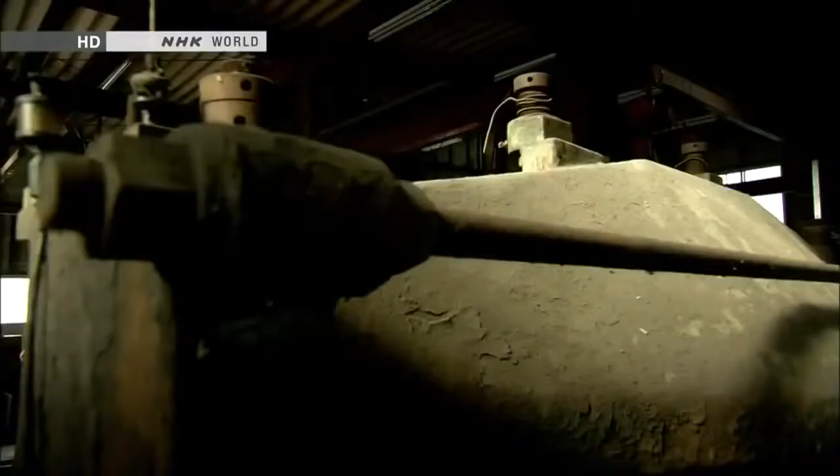In a workshop near Mount Fuji, a curious being has appeared. It's 3.8 meters tall and weighs 4 tons. It is a giant humanoid robot named Kuratas.

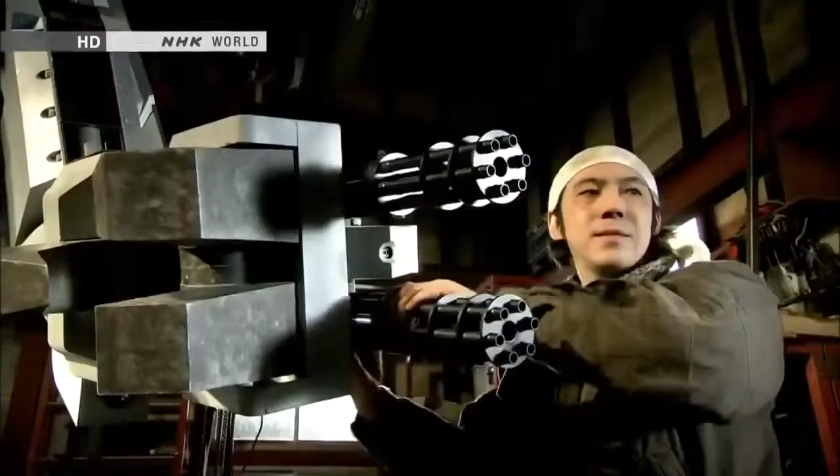Kuratas is a contemporary artist's creation. He holed up here for 2 years, building the robot with input from an expert.

He calls Kuratas a work of art, but it's a sophisticated piece of machinery. A person seated inside can control the robot, move its limbs, and grab things.

The artist says he was inspired by robots in science fiction tales and animation. That vision sustained him as he worked in solitude.

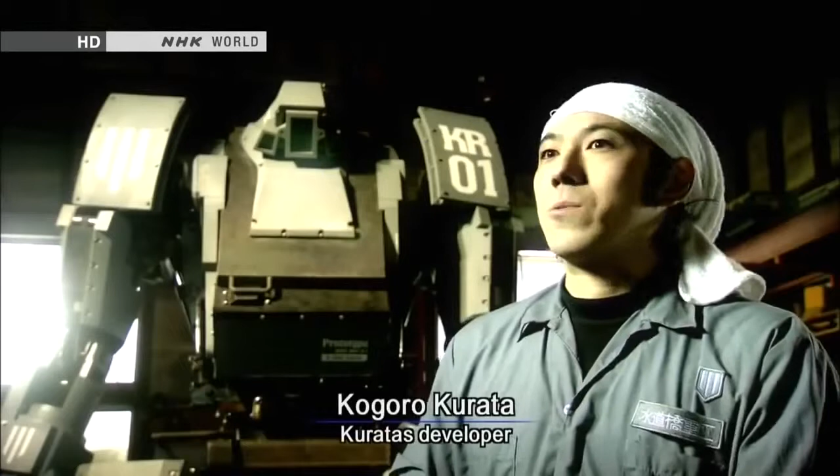Things that were once unthinkable are becoming real. How will robots evolve? Well, military applications could be one option. They'll probably become more and more like humans. They could surpass us in strength and ability.

People long dreamed of creating these extreme machines. Now, humanoid robots are here.

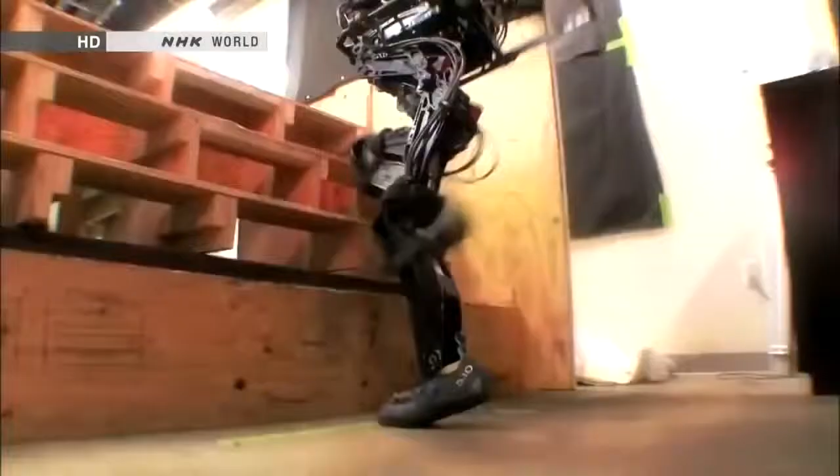They think like we do, move like we do, and even sacrifice themselves for us.

We want our robot to change society, because robots must be useful. Electronics and computing, progress in vision systems, there's many pieces of it. We will see much more capability continue to grow.

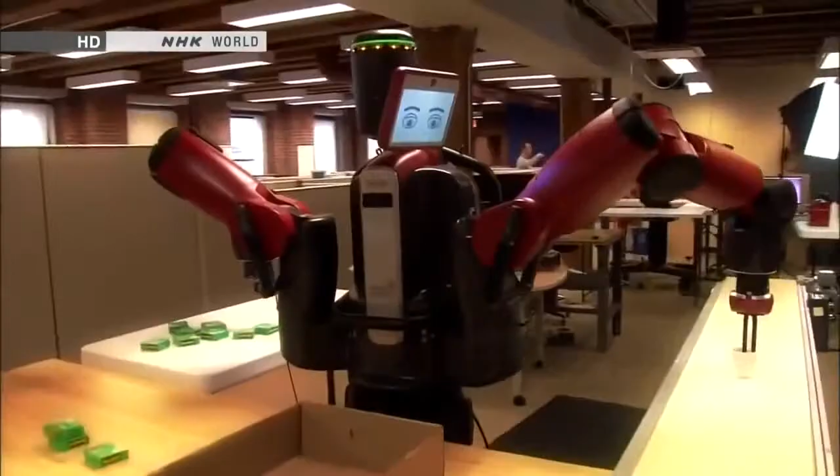Since the Industrial Revolution, people have entrusted some jobs to machines. But there may come a day when humanoid robots do much more complex jobs. Then, what will people do?

And you'll see more and more robots doing things in society, whether it's manufacturing or service applications or home healthcare applications. The key will be to skillfully divide labor between humans and humanoid robots.

The disaster that hit Japan in March 2011 accelerated efforts to develop robots with human traits. The Fukushima nuclear accident left people powerless.

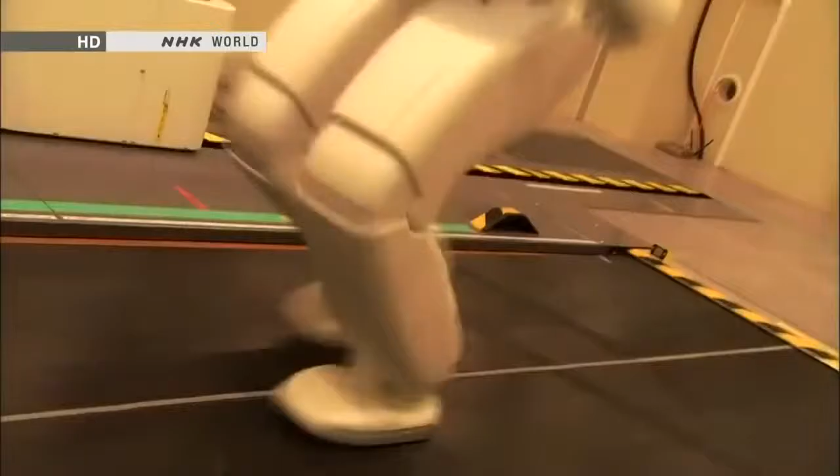Robots can take over when things become dangerous. They can plow through rubble, climb ladders, even make repairs. People are turning to humanoid robots to handle all of these tasks.

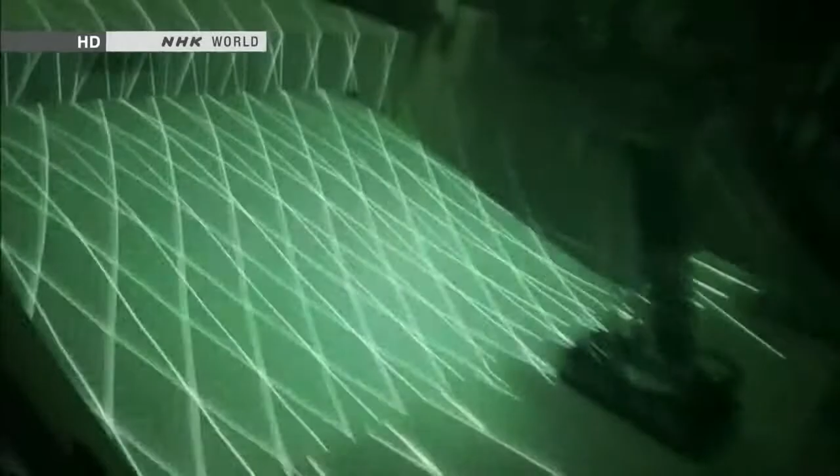We're eager to launch it soon to end the crisis. By joining forces, we can make a truly useful contribution.

Only a humanoid could do it. Or the day will come when robots will really assist mankind. The nuclear disaster in Japan sparked explosive advances in humanoids at the front line of robotics development.

This program explores the future that's fast approaching.

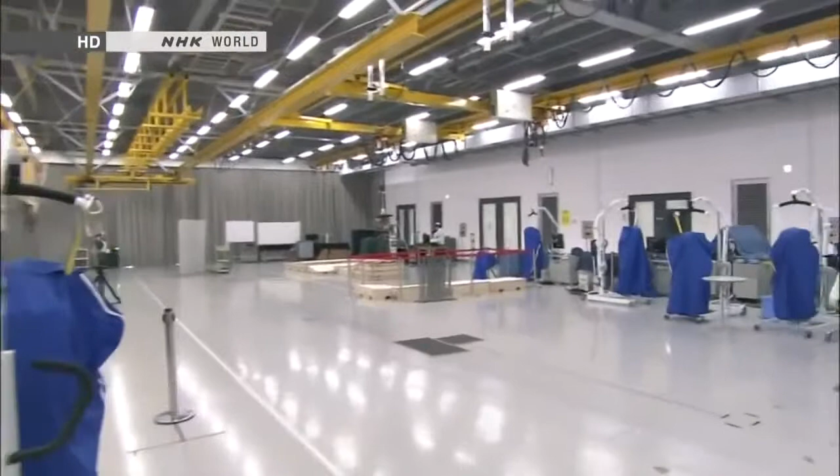Japan is a worldwide leader in the development of humanoid robots. Asimo is the country's crowning achievement. Engineers continue to make improvements.

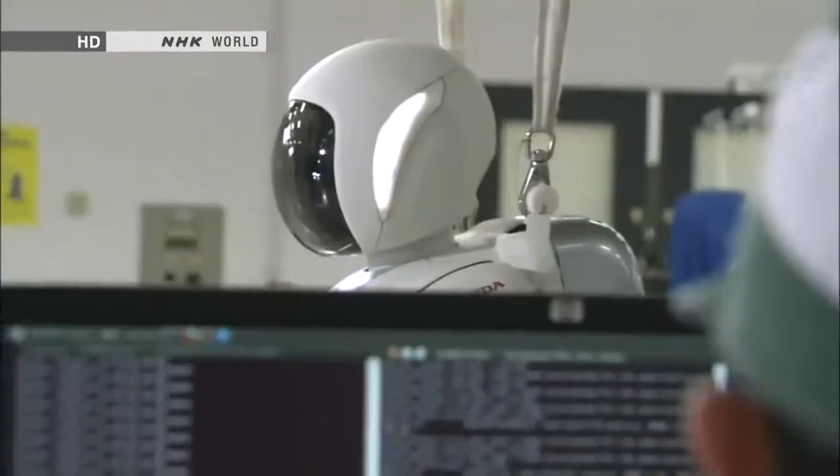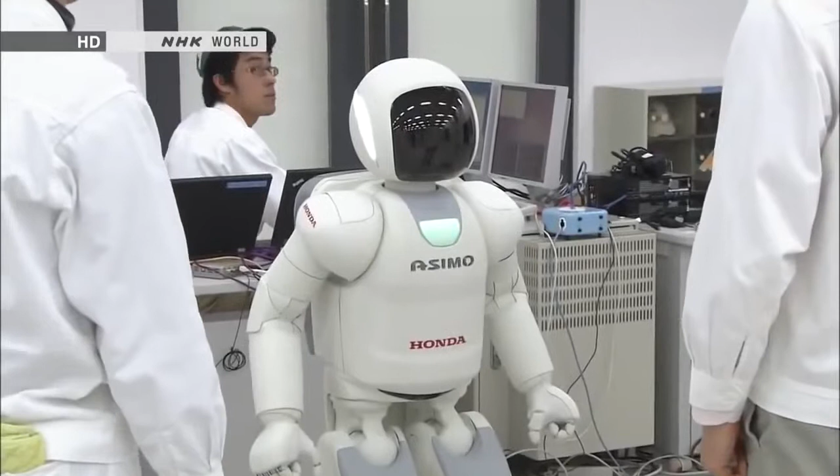Asimo's most innovative feature is its advanced intelligence. The robot can think and act on its own without human intervention. That's made possible by sensors that replicate our 5 senses.

Asimo's head contains 8 microphones. It uses them to listen and engage in conversation.

Asimo's artificial intelligence analyzes a vast array of information. That's how it understands people's requests and takes appropriate actions.

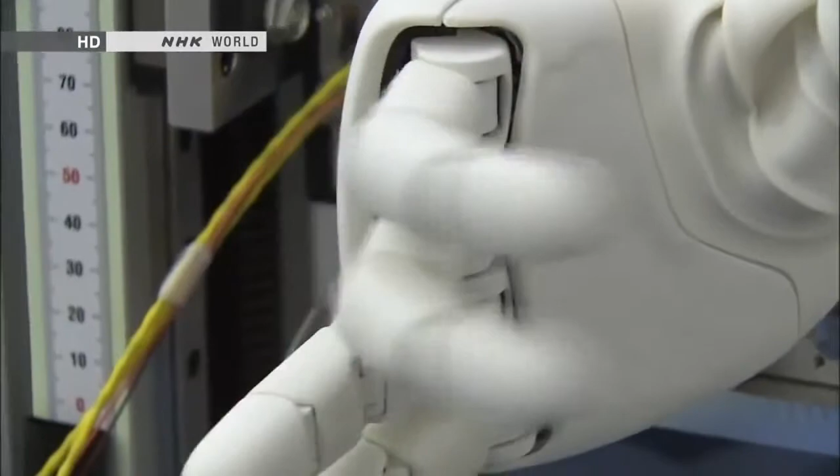Asimo also has a sophisticated sense of touch. Its fingers can make subtle movements, like a person's. Sensors are embedded in the fingertips, too. They can gauge the hardness of an object, like human fingers do.

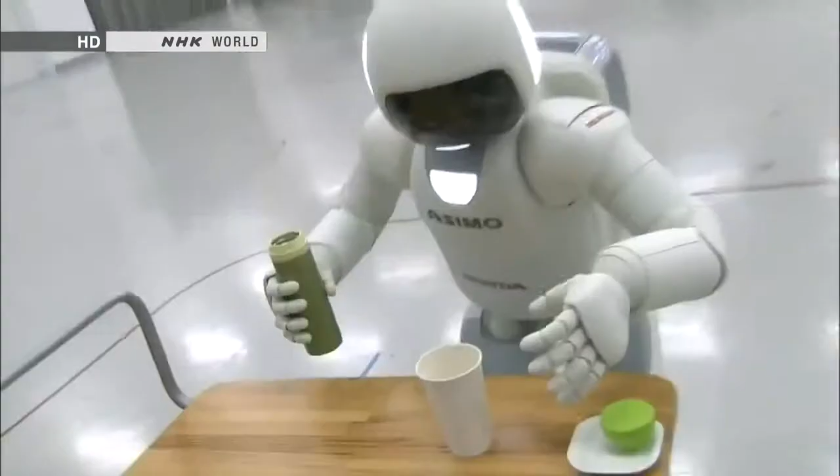Most robots use a fixed amount of strength to grab things. But Asimo exerts more power to open a tightly sealed water bottle and less when holding a paper cup. Its artificial intelligence uses information from the fingertip sensors to adjust the grip.

The developer's ultimate goal is for Asimo to be a valuable partner that coexists with humans. The engineers who created Asimo all grew up watching animated shows about robots, such as Astro Boy, Doraemon, and Gundam. They dreamed of someday making their own.

Satoshi Shigemi is the development team's leader. He has been designing robots for the past 16 years.

From the beginning, we wanted to design a robot that could help people. To realize that dream, we're constantly asking ourselves, what kind of robot would be able to change society, make people happy, and make life easier for people around the world?

Our idea is to create a robot that will change how people live. We're working through the technological issues, one by one, in order to reach that goal.

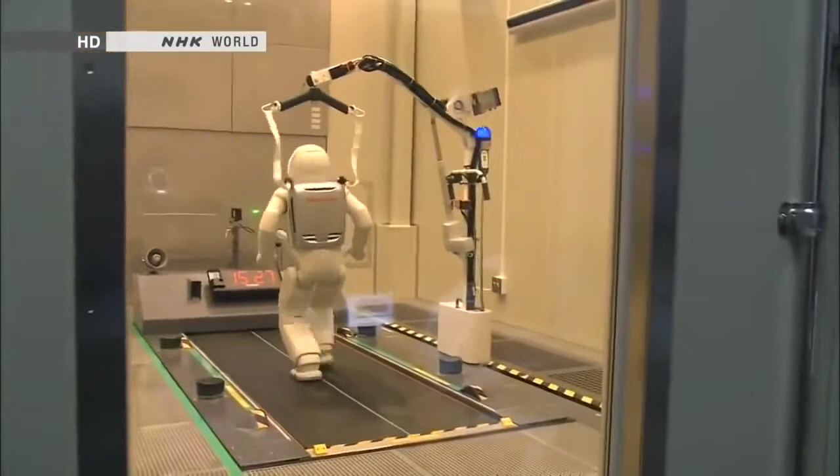Asimo's advanced physical capabilities are revolutionary. The robot can walk and run. It can reach speeds of up to 9 kilometers an hour.

For robots, walking is much easier than running. When running, both feet momentarily leave the ground. Balancing in mid-air is no easy task.

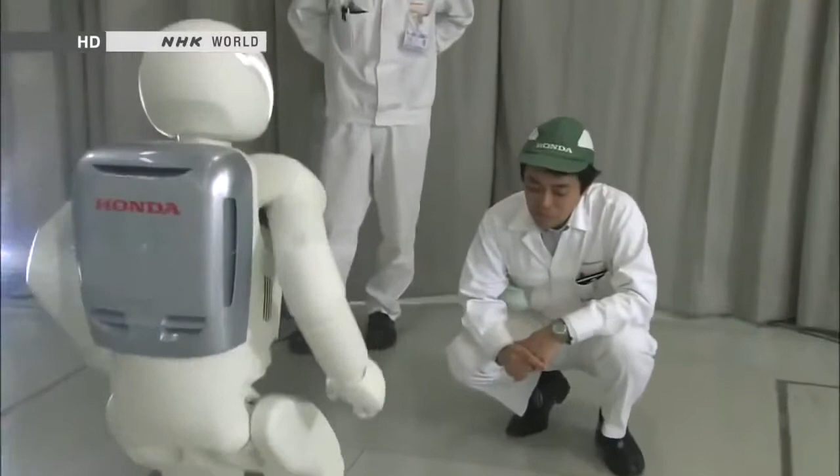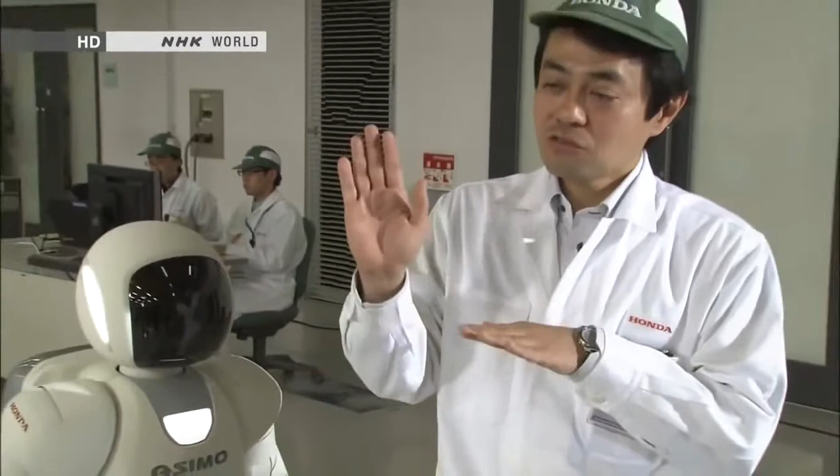Maintaining posture while jumping or floating in the air was a major technological breakthrough. Asimo leans its upper body slightly forward to maintain overall balance, going forward straight in the air. Sensors in Asimo's waist measure the robot's angle, and it leans slightly to compensate, forward or back, side to side. That's how it stays perfectly balanced in the air.

Asimo has been evolving ever since development began in 1986, much like a growing child. But something happened that made researchers realize Asimo's real-world limitations. It was the accident at Tokyo Electric Power Company's Fukushima Daiichi nuclear plant.

The damaged reactors released radioactive substances, making it difficult for humans to deal with the crisis. People needed something that could confront the dangers and bring the plant under control. Robots.

Japanese officials sent a request for robots developed by the US military. The robots were sent to Fukushima in April 2011. They recorded images inside the damaged reactors.

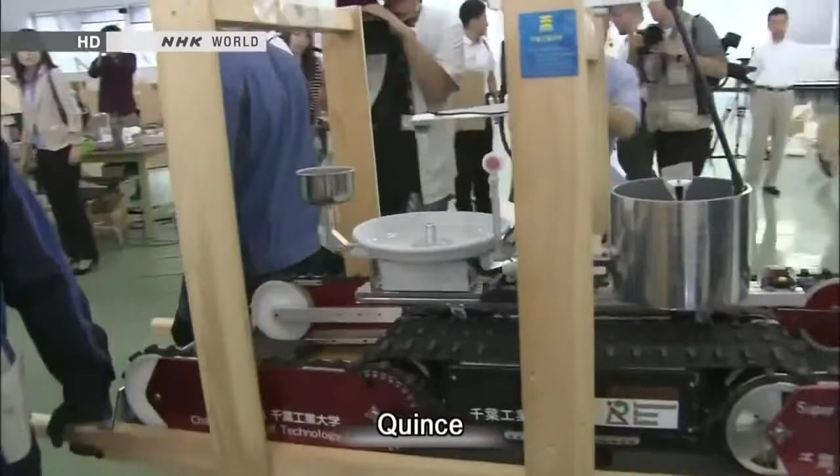Since then, a variety of Japanese robots have been enlisted as well. Robots had proven to be useful, but 2 years after the accident, they're only used for inspections. They're not able to do all the work of humans.

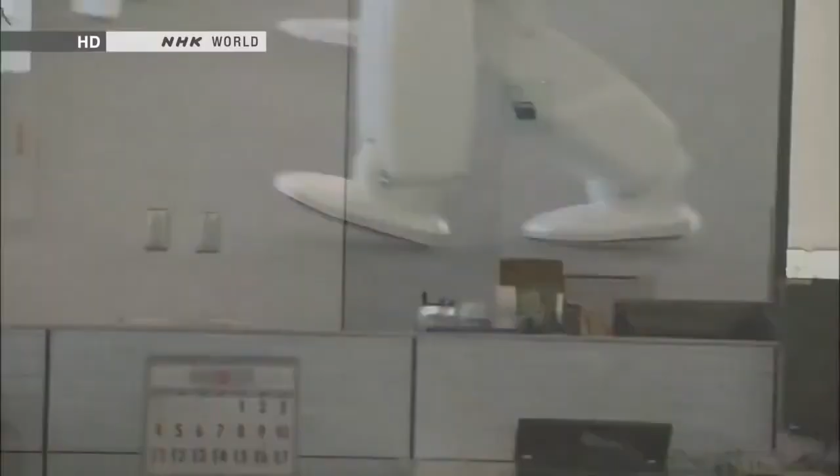What about Asimo? Right after the disaster, people flooded Honda with phone calls and emails asking the company to send Asimo to the Fukushima plant. But Asimo wasn't up to the task. It could move nimbly over an office floor and other flat surfaces, but large vertical gaps and obstacles were a different story.

We heard from many customers. We ourselves regretted that Asimo couldn't be of help. It was obvious that the Asimo we had built wasn't ready for real-life action. We realized right away that we needed to make something different, something new that could offer immediate assistance.

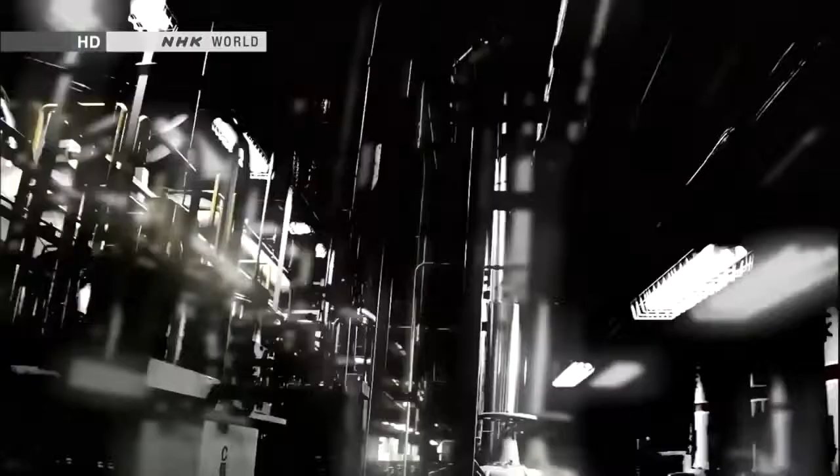Honda wasted no time. Company officials offered to create a robot free of charge to assist TEPCO in the recovery. TEPCO accepted. Officials asked for a robot that could open or close valves inside the nuclear plant.

We wanted to flush out radioactive materials that remained inside the pipes and bring down radiation levels in the facility. That was our first goal. Unless we opened or closed the valves, the area would remain highly radioactive, and that would prevent workers from entering the facility and impact the entire decommissioning schedule.

How many valves are there? Each unit has from several thousand to tens of thousands of them.

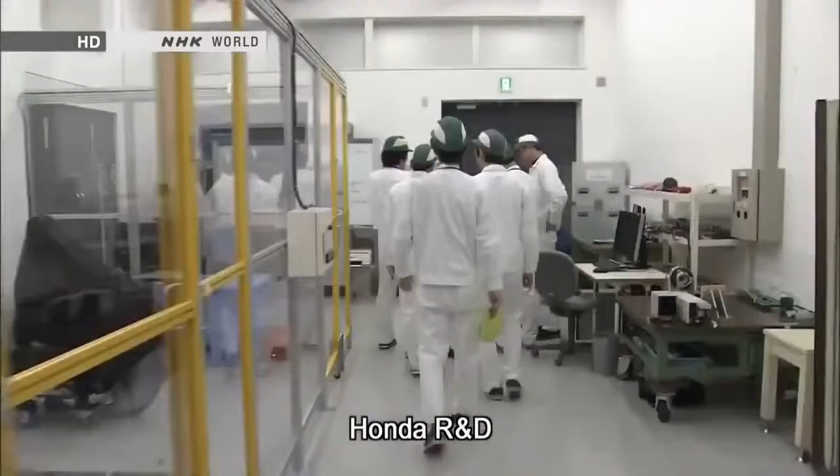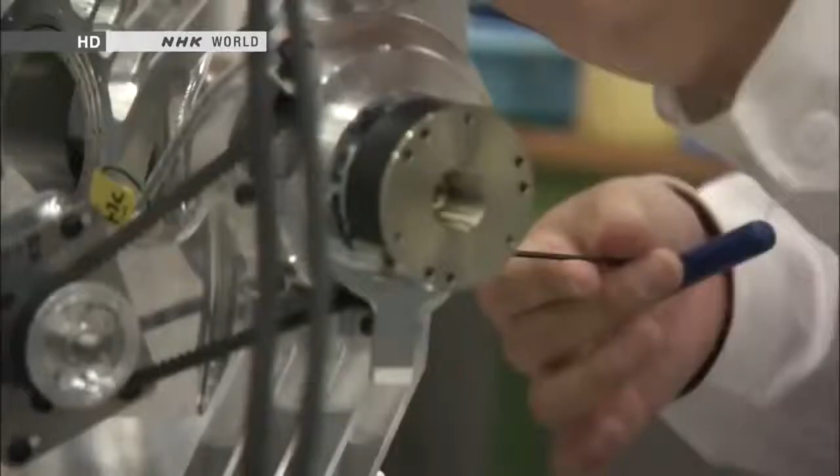In July 2011, 4 months after the accident, Honda began designing a robot for use at the nuclear plant. Members of the Asimo team were put in charge of the project. A humanoid robot would take too long to build, so engineers focused on making a robot specifically for operating valves.

Asimo was crucial to their efforts. Its ankles employ advanced balancing technology. Developers reasoned that using it would allow the new robot to work inside rubble-filled reactor buildings.

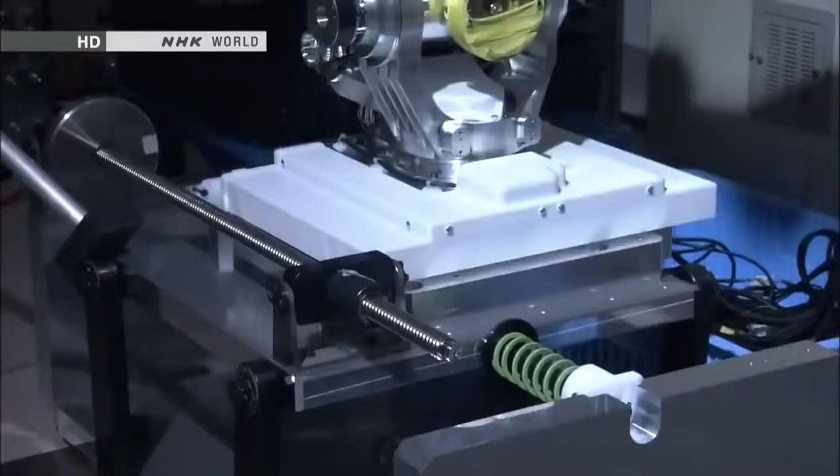The team worked exceptionally fast, completing a prototype in just 4 months. They turned Asimo's leg into an arm for operating the valves. Even when the base moves, the arm remains steady.

So far, so good. Officials from TEPCO evaluated the prototype at the National Institute of Advanced Industrial Science and Technology. The government-backed group for cutting-edge research contributed to the development effort.

A TEPCO official couldn't take his eyes off the robot's movements. We may be quite demanding. That's okay. We might be quite direct. The test is designed to replicate conditions inside the nuclear plant.

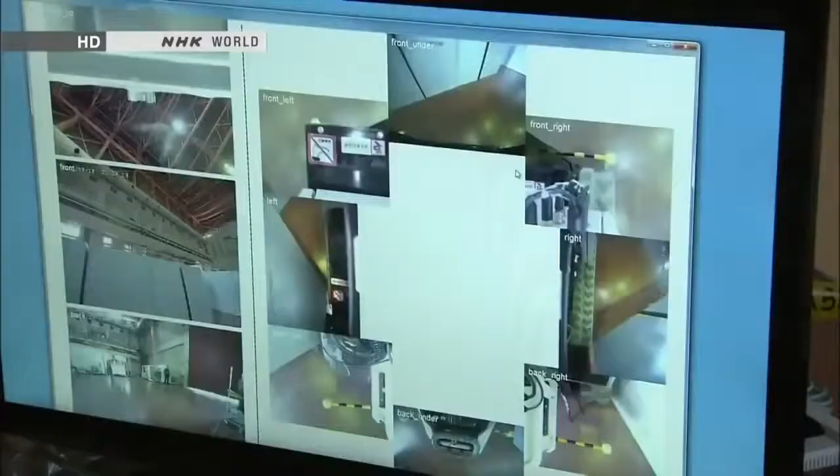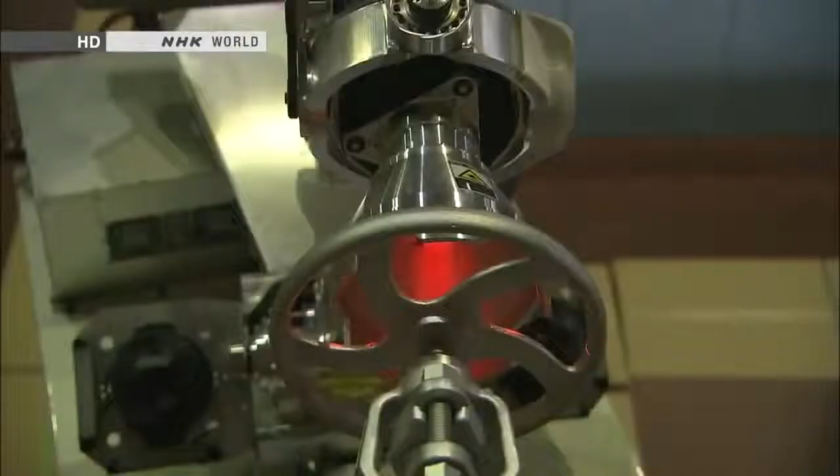The robotic arm is remote controlled. Testers send the arm toward one of the valves. There are a number of unknowns, including the condition of the valves. They may have rusted since the accident. A valve might break if the robot applies too much force, or it might not budge at all.

The robot uses just the right amount of force and turns the valve on the first try. It's passed the test. This robot can do more than inspections. It could help in the recovery effort.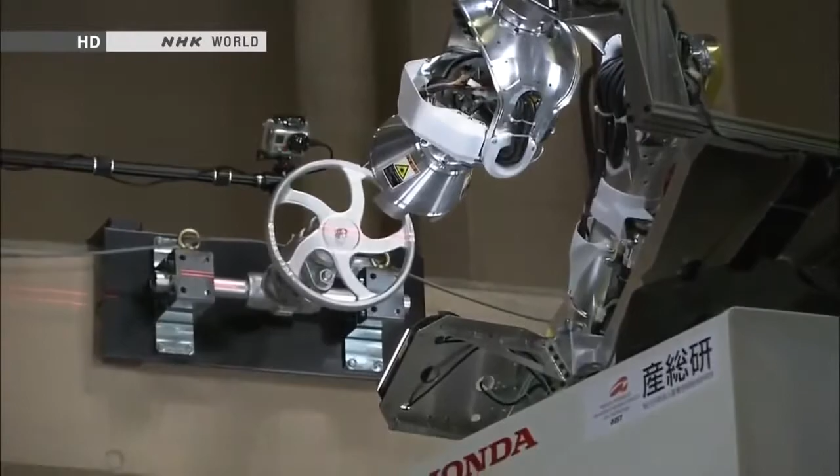From what we've seen, the robot seems near perfect. We want to use it as soon as the need arises. It's important that we quickly do what we can to make that possible.

The Fukushima accident also encouraged U.S. developers to design emergency response robots. Department of Defense officials have spearheaded the effort. Before, they had shown little interest in humanoid robots. Now, they view them as vital for disaster response.

The architect of the new strategy is Gil Pratt of DARPA. He oversees funding for leading-edge research at the Department of Defense. There are many aspects of disaster response in Fukushima that inspire people in robotics to work on new capabilities.

If they were able to take action during those first 24 hours, then the first reactor maybe would not have blown up in an environment that is too dangerous for a person to do. What's important to us is that the robot is compatible with human environments, compatible with human tools, and also compatible with human operators without special training. As a result, the easiest form that comes to mind is the human form.

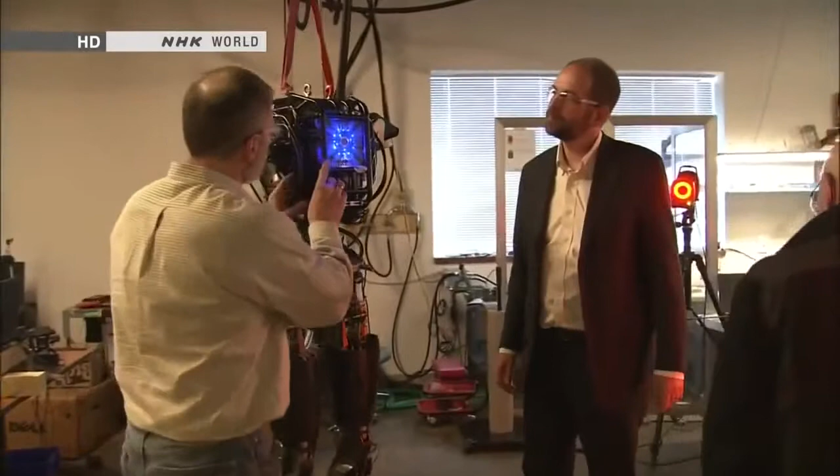This is the first American-made humanoid robot for disaster response. It's called Atlas. Before, U.S. designers had focused on robots with specialized functions.

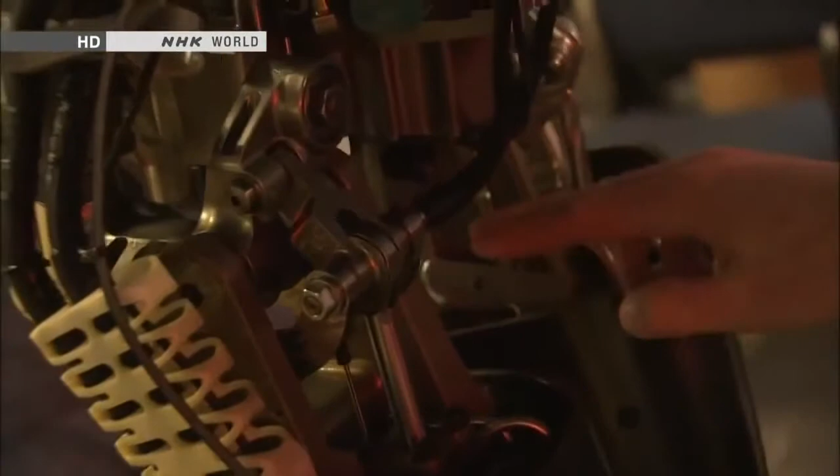Why the sudden interest in humanoid robots? Traveling over debris, prying open valves, using tools for repairs - performing multiple tasks like these is impossible for specialized robots. Crises also require robots that can navigate doors and stairs. Humanoid robots are ideally suited for such situations.

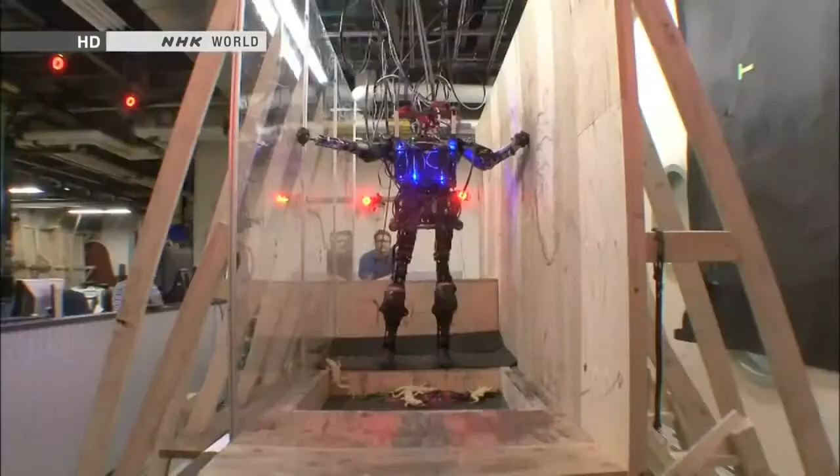Tests of this prototype were going smoothly. It can easily climb stairs and jump from a height of nearly 1 meter, and can negotiate obstacles using its arms and legs. It can already handle more demanding environments than Asimo can.

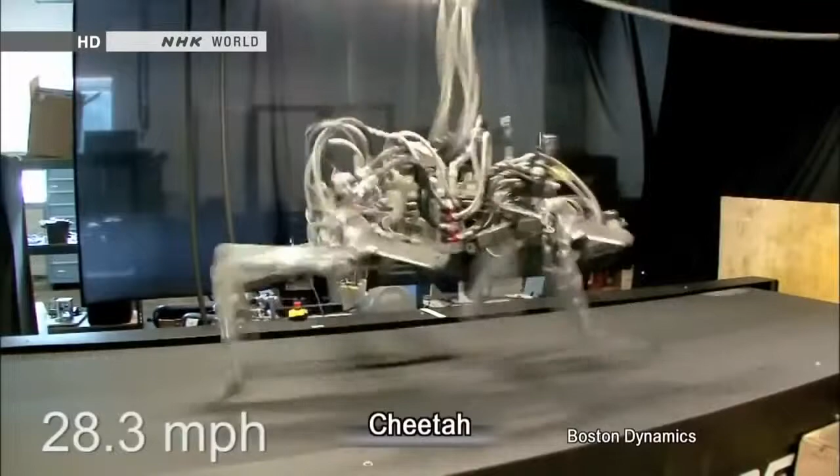Atlas is loaded with technologies originally designed for military robots. A quadruped robot called Cheetah can race through a battlefield at 45 kilometers an hour. LS-3 is for transport - it can carry heavy supplies for soldiers.

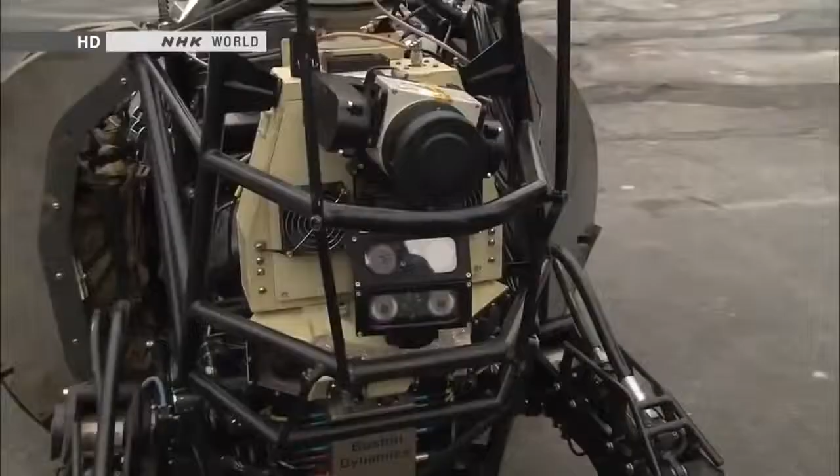The ferocious-looking robot gets its strength from a powerful hydraulic drive system. A hydraulic device can be small, yet quite strong. The black cables convey hydraulic power to the legs, generating the brute force required for harsh conditions on the battlefield.

A web of hydraulic cables covers Atlas's body. They form a muscular suit of armor for clearing debris.

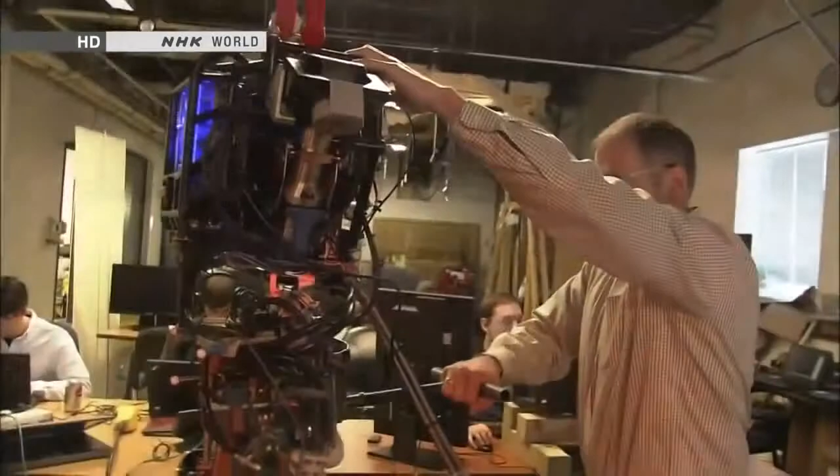Another important technology comes from military robot engineering. This machine's joints have a wide range of motion, allowing for flexibility that humans can't achieve. Atlas's joints are capable of moving in 28 different ways. Atlas can crawl through narrow spaces and withstand sudden shocks.

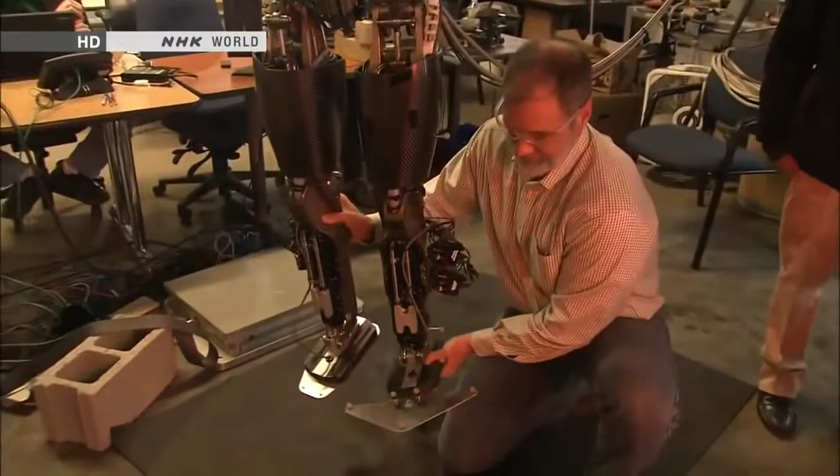But then we have the knee - this has 3 in the hip, just like us. This way, and then this way. I am very impressed with the number of degrees of freedom. It will be able to do these human-compatible tasks without a lot of the limitations that other robots have.

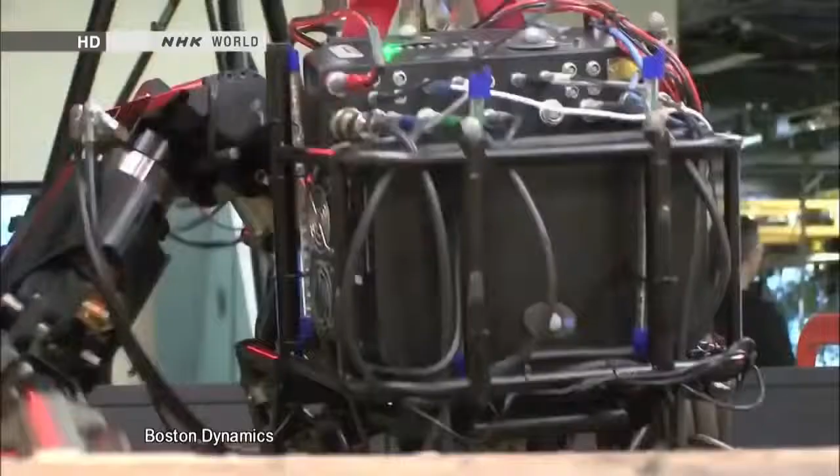Engineers will combine Atlas's rugged body with sophisticated artificial intelligence that's almost near completion. They aim to complete the robot by December of next year.

One reason you see humanoid robots is because there are some people working who are really interested in robots as an entertainment thing or as a performance thing. I think that's different. We're much more interested in basic capabilities for emergency response, rescue. So I don't think Asimo has been designed to do those things yet.

U.S. engineers stepped up their efforts to develop humanoid robots after the nuclear accident in Japan. Japanese researchers are embracing the same mission.

In November 2012, robot engineers from around the world gathered in Osaka for an international conference on humanoids. Gill Pratt from DARPA was one of the participants.

He came to invite engineers to join a project sponsored by the U.S. Defense Department. On March 11th, after 24 hours, if only a robot had been there to go and open that valve, the entire disaster could have been averted. But we didn't have one, and furthermore, we didn't have anyone that could do the job. So shortly afterwards, we actually started planning the DARPA Robotics Challenge.

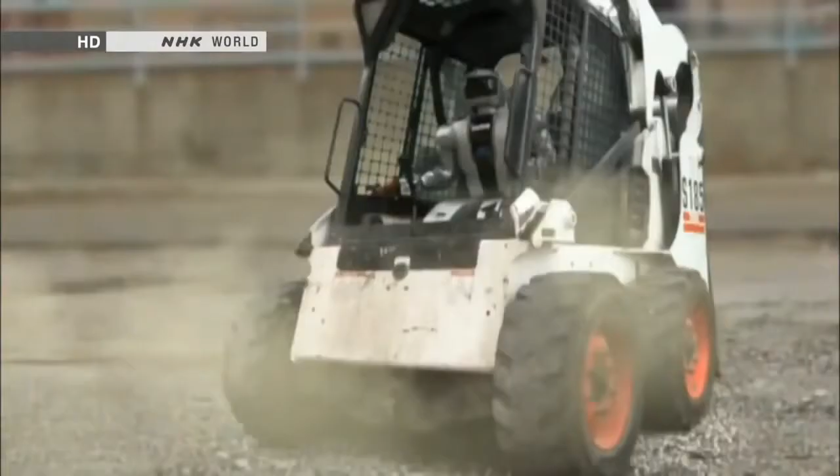The challenge consists of 8 tasks: driving a vehicle to approach a disaster site, walking over rubble, removing obstacles, opening doors, using tools to break down walls, climbing ladders, turning valves, and making repairs.

A single robot must complete all 8 tasks. The development period is 2 years. DARPA will provide contestants with funding of up to $4 million.

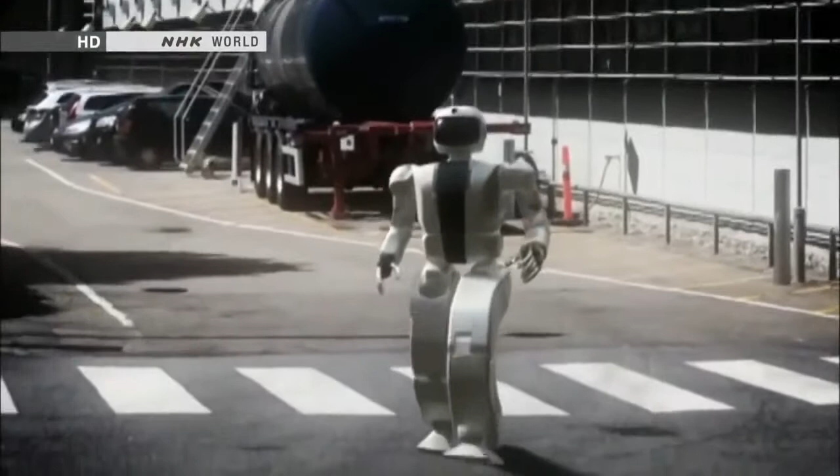DARPA has received over 100 proposals from research groups worldwide. They include renowned organizations like NASA and MIT.

Japan is at the forefront of humanoid robotics engineering, yet its researchers hesitated to throw their hats into the ring. So actually, to me, it's difficult not to see that some of the results of the DRC are going to be used to advance, as you say, advanced military technology. The DRC is about developing robots that I believe wholeheartedly are completely impractical for military purposes, for offensive military purposes.

Will the technology that we come up with find its way into military systems? Probably yes. But I guarantee you that if you work on a robot for healthcare, there's a chance that that technology will also find its way into military systems.

The members of one Japanese research institution wanted to take part in the competition.

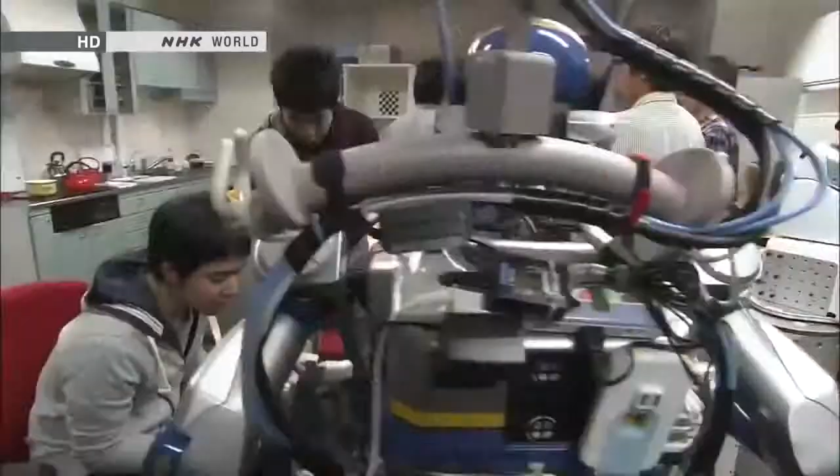They worked at the University of Tokyo's robotics lab. Researchers there, along with those at Honda, are global leaders in robotics engineering. But they faced a major obstacle to competing: the university bans military-funded research.

Three researchers made a decision. They told the university they were leaving. Then they decided to set up a venture company and enter the DARPA Robotics Challenge. They couldn't shake the feeling that they should leave their quiet university lab and help resolve the nuclear crisis.

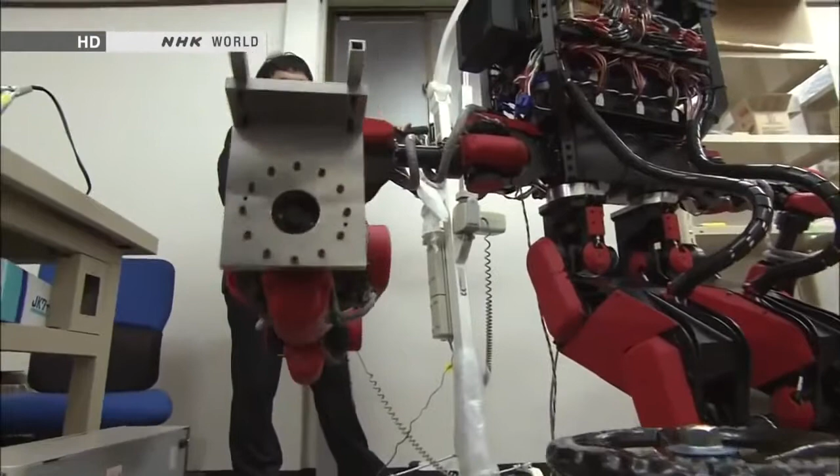Six months after launching their venture, the team had just completed a prototype with help from university graduates. Its long arms can exert 10 times more force than those of conventional humanoid robots.

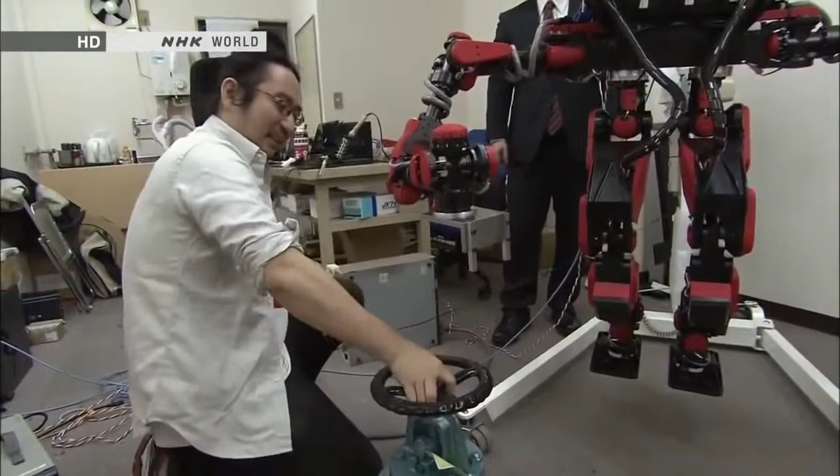It's too tight to turn with one hand. It can easily turn a valve that's too tight for a person to turn. The strong force comes from a large electric current that pushes the motors to their maximum limits.

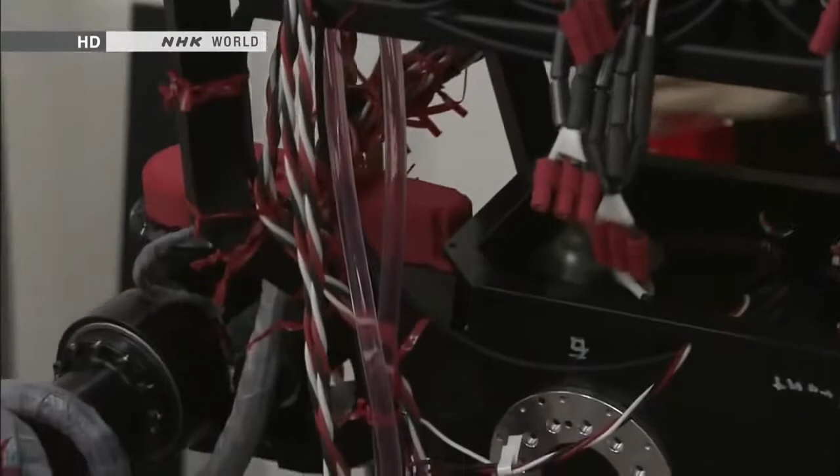A reddish fluid circulates through the robot's body. The fluid serves as a coolant that keeps the motors from overheating. The cooling system should enable the robot to perform hours of grueling work at disaster sites.

The time has now come for the developers to apply their years of research to the real world. A nuclear crisis has happened here in Japan. Radiation is escaping. Researchers in every field must wonder at least once if the technology they've been working on could help resolve the crisis. By joining forces, we can make a truly useful contribution. It's with this in mind that we decided to enter the competition.

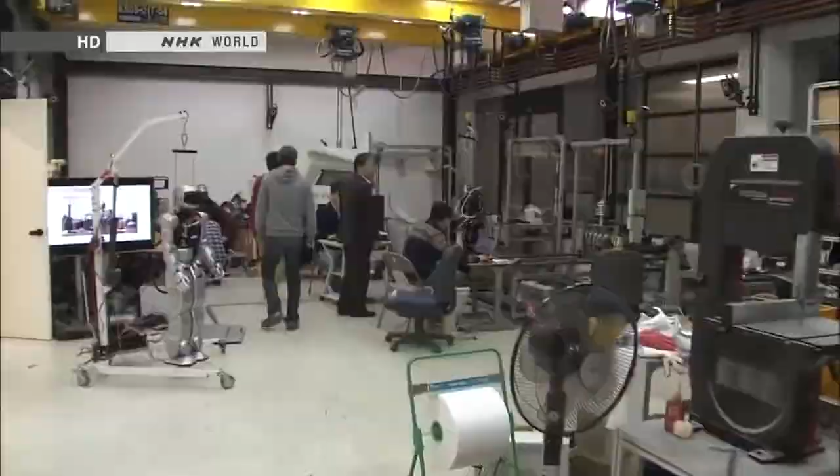One country is quickly catching up with Japan in humanoid robotics: South Korea. KAIST is a government-funded lab for the advancement of science and technology. Researchers there were among the first to express interest in DARPA's Robotics Challenge. This humanoid robot is called Hubo. It's modeled on Asimo, which Honda spent 14 years developing. Hubo was built in just 5 years.

Hubo deftly manipulates its hands, and it's also good at dancing. Its moves look just like Asimo's. Hubo has been undergoing a major upgrade ahead of the competition. It can now bend backward at the waist while walking to handle all kinds of environments. It can quickly pick up tools. The tests were going well.

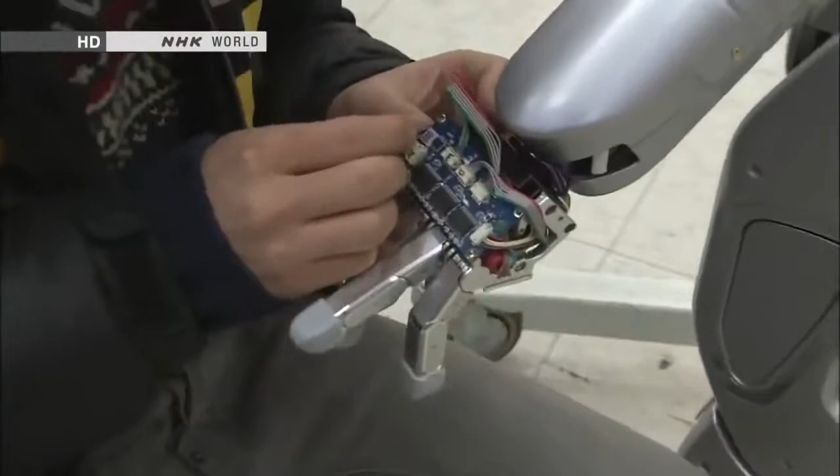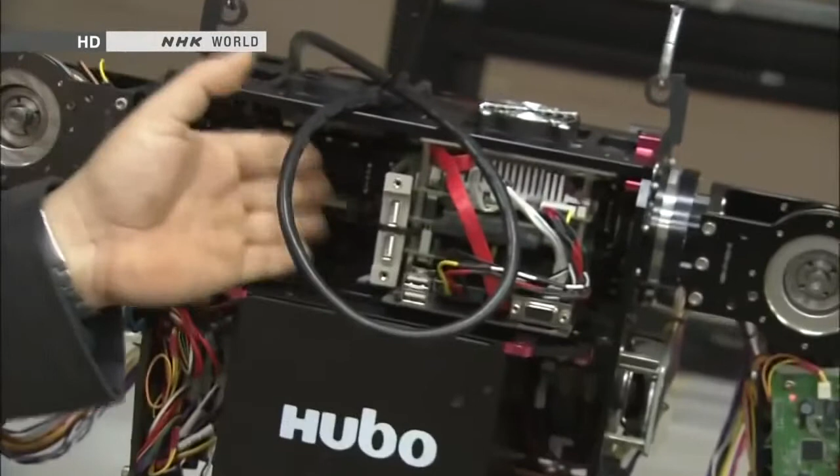People have always compared Hubo to Asimo. Engineers now had a strategy to get ahead of the Japanese developers. They decided to publish certain details about Hubo's design and pursue joint development with researchers at other institutions. One could say that this space inside Hubo's chest captures the heart of their thinking. It's empty now, but this is where artificial intelligence will be installed.

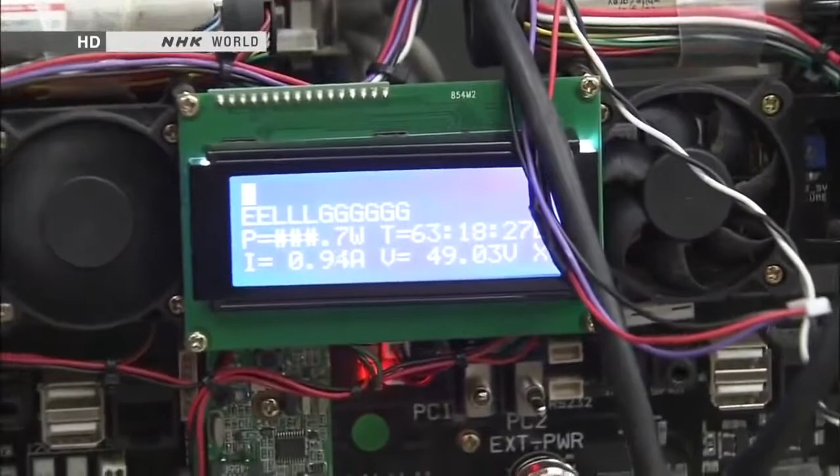It's removable. Hubo does not yet possess artificial intelligence. Its motions are as sophisticated as Asimo's, but Hubo's movements are all pre-programmed. U.S. universities that lead research into artificial intelligence will develop a brain for Hubo. The stage has been set for a joint U.S.-South Korean team to compete in the DARPA Robotics Challenge.

Sharing is the key to making technological advancements. That's true in South Korea and in other places too. Research shouldn't be confined to one place. People developing humanoid robots elsewhere are too close-minded.

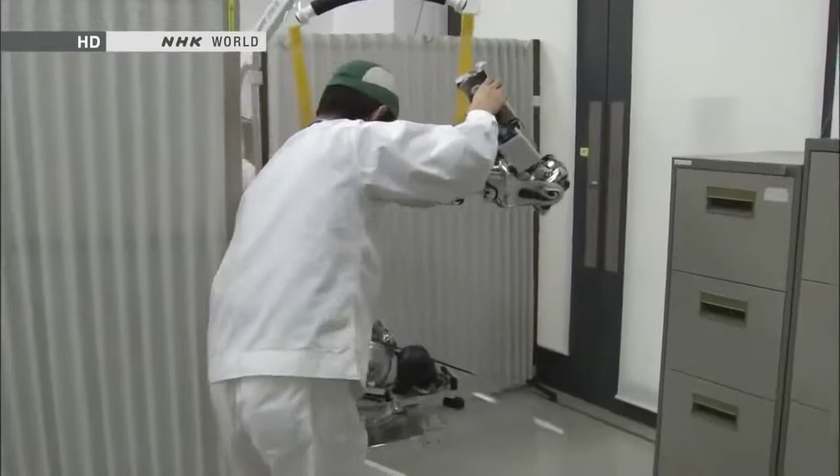Researchers at Honda were also invited to enter DARPA's competition, but they declined. Their energies were focused on designing a robot to tackle Japan's nuclear crisis. Nearly a year has passed since Honda's robotic arm passed evaluation tests, but the device has yet to be deployed to the nuclear disaster site.

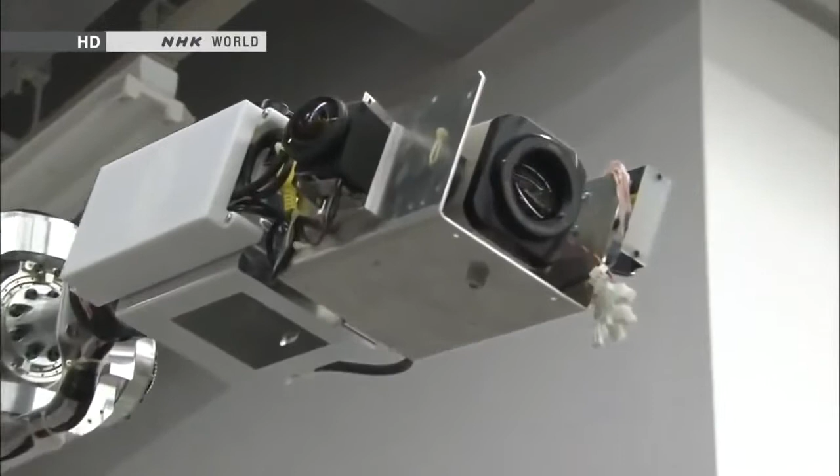That's because officials at TEPCO requested a change in specifications. Engineers have replaced the valve-turning hand at the end of the arm with a camera. TEPCO had changed its plan. Officials decided to put priority on assessing conditions inside the plant's facilities. They said it was too early to have robots work on valves.

There wasn't even a recovery plan in place when we were working out the valve manipulation tasks. Confusion also prevailed at the site. We were expecting valve work to begin 2 to 3 years after the disaster, but the timing has ended up being later than what we'd assumed 1 month into the crisis.

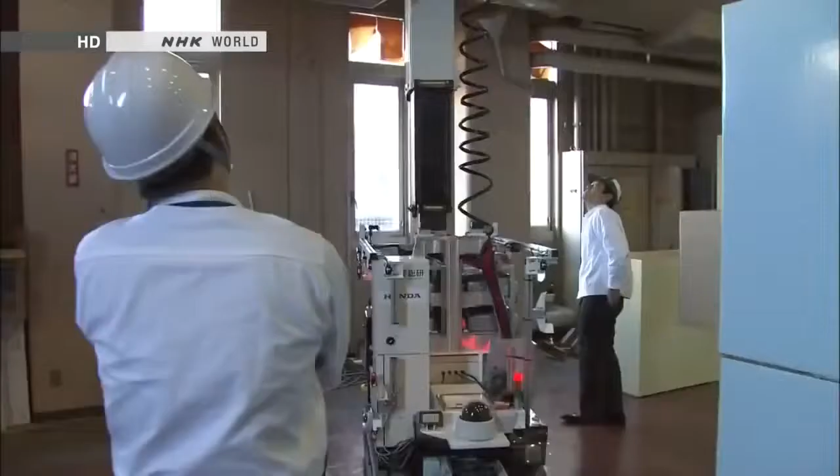The robotic arm will soon be sent to the accident site. It will provide the first images filmed from high up. The robotic arm was not the end of Honda's efforts. Its engineers had another secret mission.

They would develop a new humanoid robot, an updated version of Asimo for use in disasters. The site where the Fukushima disaster took place is dark and off-limits to humans. Only a humanoid robot with both intelligence and motor skills could climb over the debris, get to the accident site, and perform the work of people. In other words, a robot like Asimo. Let's use our skills to make a humanoid robot that can tackle disasters.

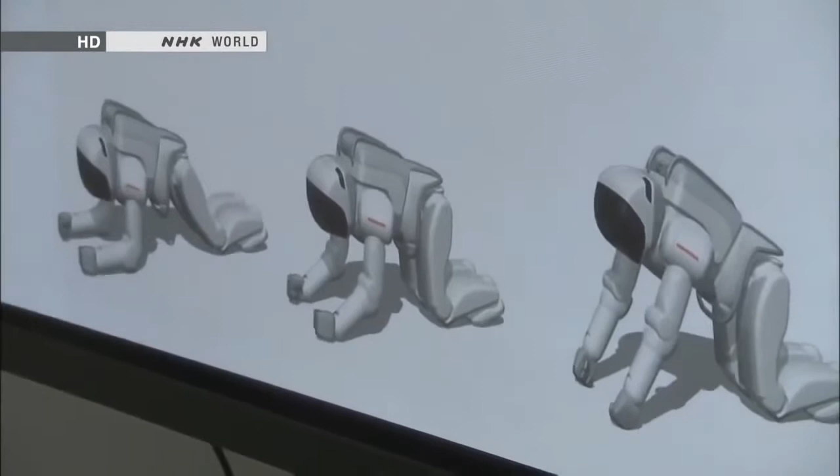Asimo's engineers were united by this idea. The robot they envisioned would not only walk, but also use its arms to crawl. It would use every means possible to reach its destination. A dramatic update would be necessary.

A disaster reduction robot would be useless if it couldn't get to the site. It's important to get to the scene no matter what. Disasters create all kinds of debris that crumbles easily or breaks when stepped on. It's because it's dangerous that robots replace humans. That's what makes them valuable. A robot that couldn't get to the scene would be totally useless.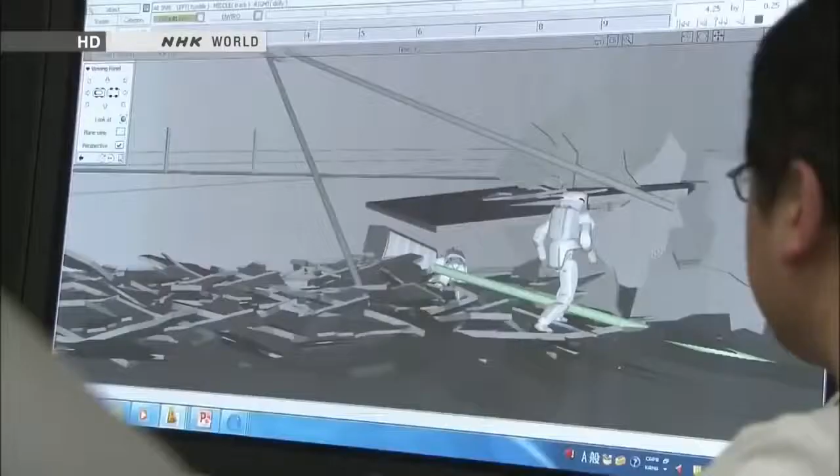Honda's engineers began developing robots in 1986 with the goal of making people happy. 27 years of research is now being put to the test.

As we saw in the Fukushima Daiichi crisis, the bottom line is that robots can stand in for humans in places that we can't go to or that are too dangerous. I am committed to delivering what's needed, when needed, in the shortest amount of time.

The accident in Fukushima spurred the development of humanoid robots around the world. The disaster also prompted people to question the roles of humans.

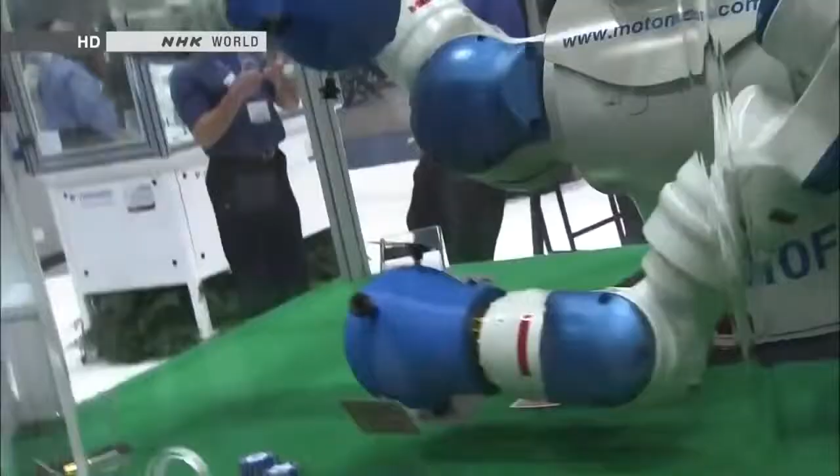One of the largest trade fairs featuring industrial robots took place in January. Global manufacturers displayed their latest models. Companies are developing more and more two-armed humanoids for industrial use.

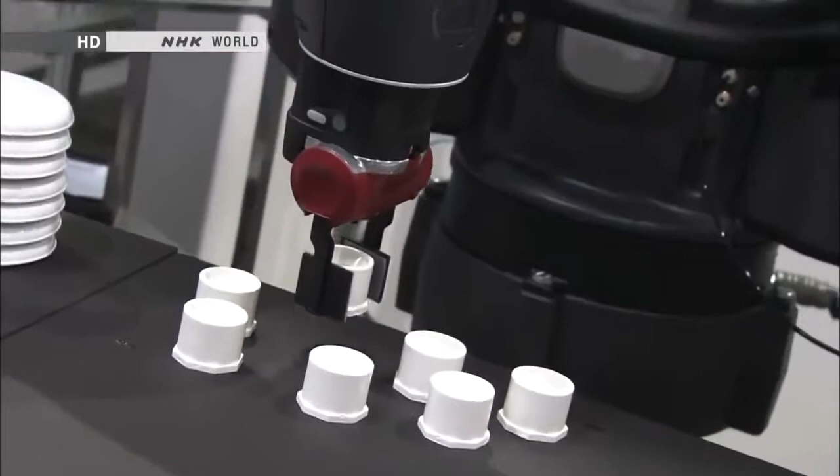One new product at the event caught a lot of people's attention. Baxter was created by the inventor of a best-selling cleaning robot. It's equipped with sophisticated artificial intelligence. Baxter is designed to work side by side with people in factories and other settings.

The robot's most unusual feature is its ability to master a task in a matter of 5 minutes. All that's required is step-by-step manual instruction. No complicated programming is needed.

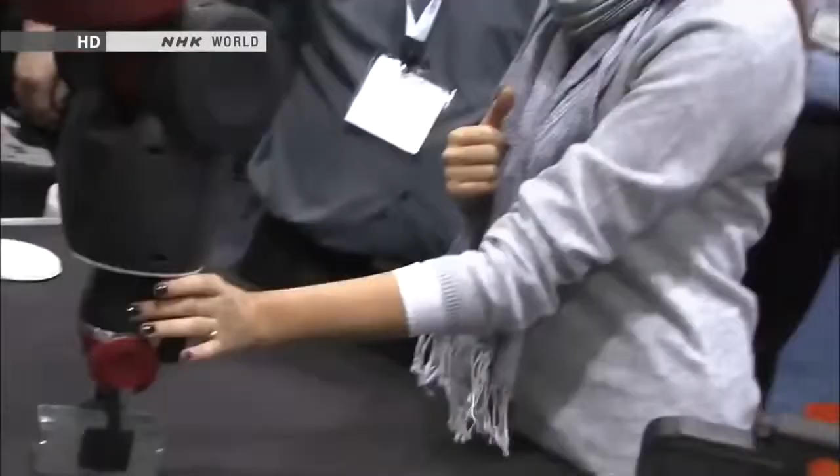Let's pick up this part. So you bring the arm to the part. Yep, just like that. So we have the part. Close the grasp. Yep, grab the arm and bring it to the table.

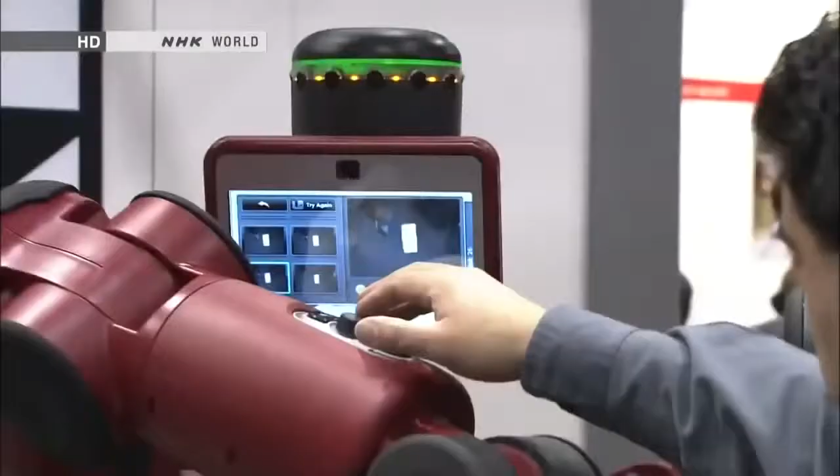The expression of the face on the LCD screen shows whether or not the robot has understood the task.

Baxter costs $22,000, a bargain for a humanoid robot. The maker says buyers can recoup their investment in several months and slash labor costs.

I'm very impressed with it. I work for a small manufacturing company, and we have some older employees who are looking to retire, and there's some tasks that Baxter could do for us very effectively. Plus, it would be cheaper than employing a person. It's not going to get tired, it's not going to need to stop, it'll keep running while everybody else is taking their lunch.

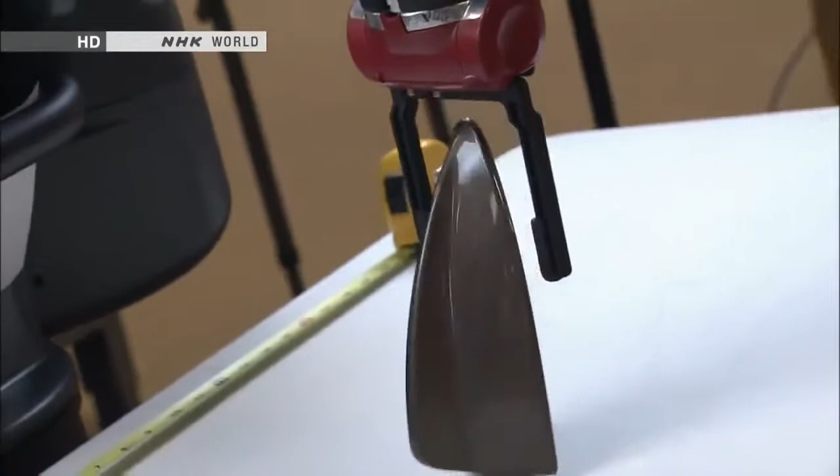The Boston-based manufacturer has a flood of back orders. Officials say someday Baxter will work at places like coffee shops, taking orders and grilling burgers. Eventually, they expect to have 500,000 U.S. customers.

Today we're focused on manufacturing, and there's a very big opportunity in manufacturing, but there's lots of other places a robot like Baxter could go. We had the Industrial Revolution at the turn of the last century. We've just gone through the computer revolution, effectively at the turn of the most recent end of the century. We are now into the robot revolution.

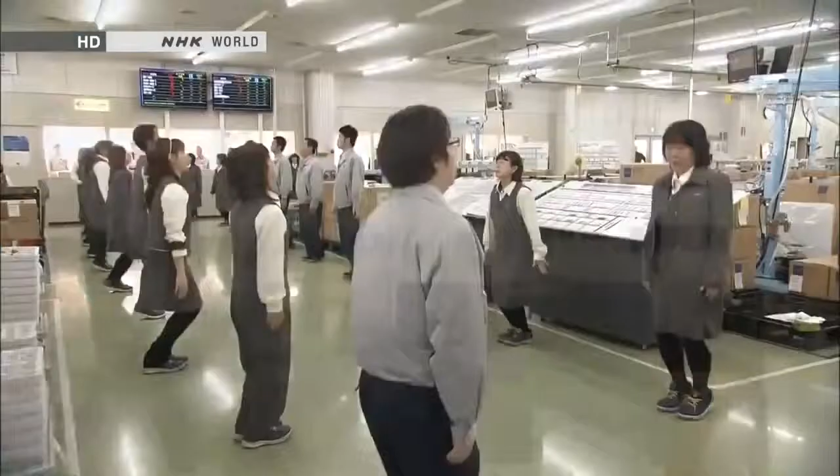Will people and robots someday compete for jobs? At 8:30 one morning, a group of new employees takes part in daily morning exercises. They are 13 humanoid workers called Nextage. This company began using the robots in earnest last year.

They have 2 eyes and are just like humans. They're cute!

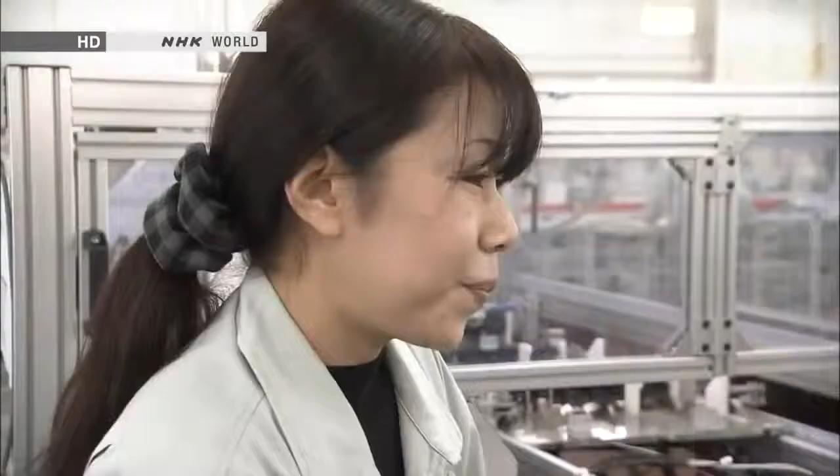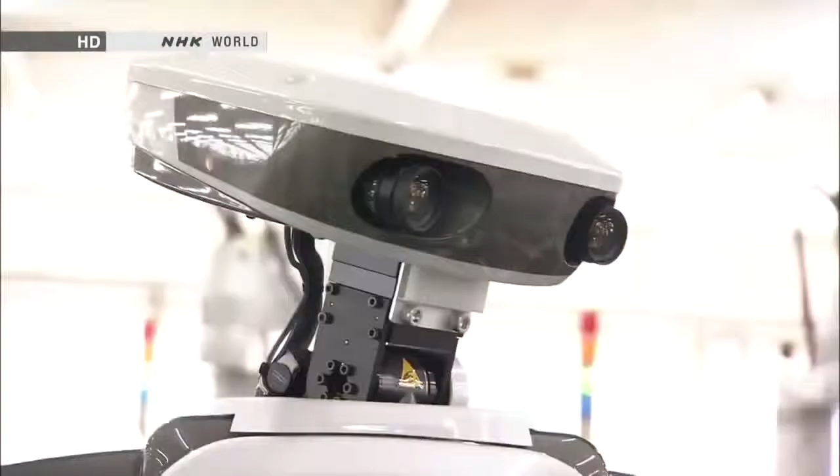This factory manufactures money sorting machines for cash registers. The humanoids work on a production line that was previously manned entirely by humans. The robot visually confirms the parts set in place by a human worker, then it begins its task.